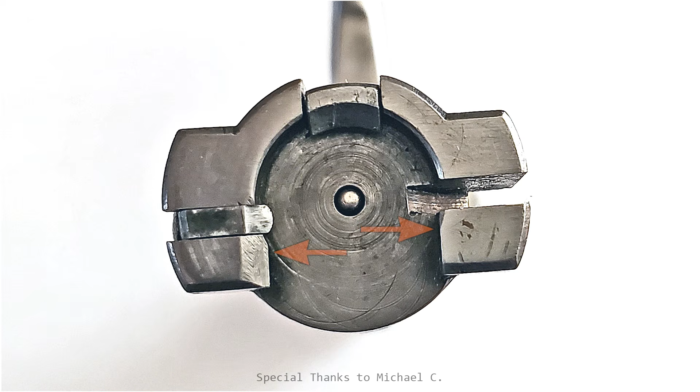In an attempt to correct this issue, Mauser began, well, originally over-engineering it. By the time of the Spanish 1891, this had evolved into a set of grooves on either side of the bolt face, which would grab the cartridge right away, however, without any spring tension. Then, as the cartridge rose during the feeding process, it would snap past this spring detent, which then kept it biased to the extractor, meaning it could not interfere with the next cartridge to feed. This proved troublesome and inefficient in actuality.

The new rifle was issued to the Saboya No. 6 Infantry Regiment and the No. 19 Battalion of Cazadores de Puerto Rico. In a month-long trial, they expended some 500,000 rounds of ammunition. This appears to have been done just over December and January of 1891-1892. Further experiments carried on into April, and requests for changes were made.

Paul Mauser himself would travel to Madrid in July of 1892 with samples of a new rifle and carbine to meet Spanish expectations. Just to be clear, at this same time, Sweden was also trialing the Mauser inventions, and they too were requesting changes. So it will ultimately be requests from both Spain and from Sweden that would add into what becomes our design today. If you'd like to know more about the Swedish decisions, well, we have an episode for that already. Their final rifle is actually pretty cool.

So what about the Spanish 1891 didn't work? What was changed? Well, sadly, I don't have the next gun in the lineage here to be able to show you because it would prove to be very short-lived. I'm of course referring to the elusive Spanish Model 1892, named as such because it was adopted in November of, you'll never guess this, 1892.

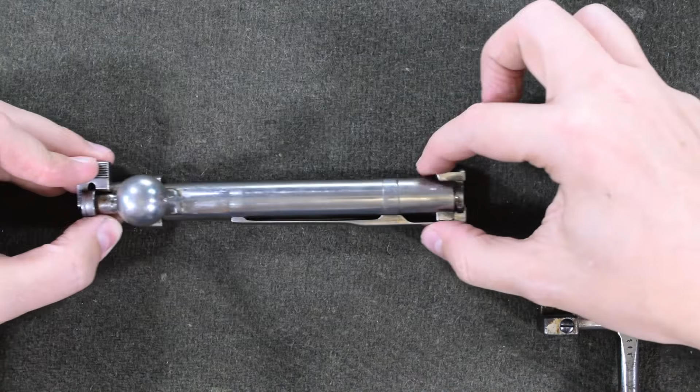And then if we fire and there's a case head separation or other rupture, you may have gas leak down the raceways. Well, they're going to get into the shooter's face because the locking lugs will have been turned, and therefore the lugs will not be blocking those raceways. It'll come down and it'll get stopped by one of these little wing-a-dings.

Now, these were actually added later on to the Argentine rifles in Argentina, which is why I kind of need this Ottoman 1890 to show you, because it's a little uncommon to find them on the Argentinian guns. But look at that. Perfectly smooth, and therefore not as likely to defend your precious eyes from a gas leak.

While I'm in this position, I want you to see the safety. This is a 2-position flag safety from the Ottoman 1890, and you can see we have a screw here. What's underneath that is a spring and a detent/plunger, which allows this to bias into one of its 2 positions.

Now, this is where our new 1893 deviates from what would have been the design that's in between these two, because the design in between these two would have still had the detent, it would have still had this screw. This does not. We'll see what this was replaced with in a moment. And at the same time, it would have had a 3rd position. Let me explain those positions to you.

On our Ottoman rifle, these are the 2 positions. Fire, where we can discharge the rifle, or safe, in which we cannot. At no point in the safe process, even in this middle position, can we open up the action. We have to be on fire in order to withdraw the bolt.

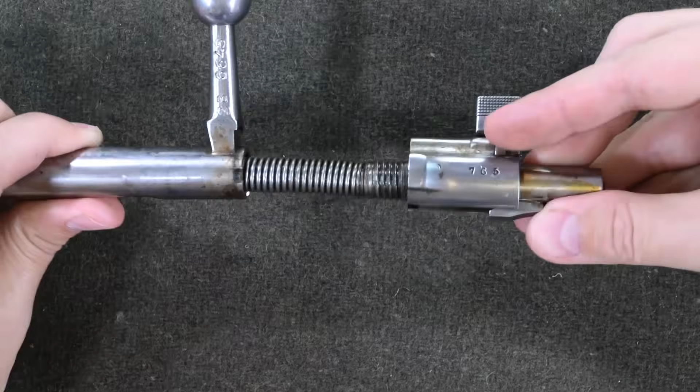What that middle position has done for us is it's held the cocking piece to the rear, whereas the previous design we'd have had to pull back on this. And with it rearward, we're able to do a little magic. We can just go ahead and unscrew our firing pin assembly from the bolt body. Now, this feature was already in the 1892, and another feature that was already in that gun is the perfectly always set firing pin position.

Because on the earlier guns, they would have been threaded in, and in this case, we have an interrupted lug pattern. Let me show you that. Previously, we'd have to depress this cocking shroud, and then start rotating this guy like a screw. But in this case, we now just have to turn him 90 degrees, and then we're out.

So ignoring the other components for a moment, that means that once we have set our depth to a fixed point and turn 90 degrees, our firing pin is set in relation to the cocking piece. That means that since the sear engages right here on this lip, this distance is always set correctly, that distance between these 2 points.

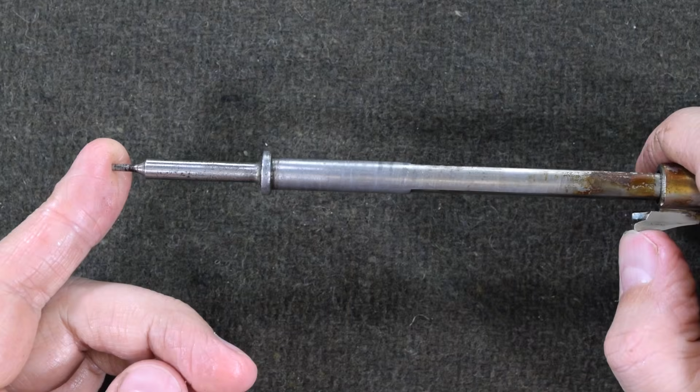So that means you're not going to end up in a situation where this is overset and therefore poking a primer too soon, or underset and therefore not striking a primer when you intend to fire the gun. This is a critically important little advancement that really makes sure that this is idiot-proof.

The final advancement of the 1892 bolt, which carried on into the 1893 we have here, is this groove right here. This is a safety notch for the front of the sear assembly for the trigger. So you'll see this better in an animation in a moment, but the short answer is if this gun is anywhere out of battery, as in if this is not perfectly aligned with what would be the poker for the sear, so if we're here, it can't poke, then the gun can't fire.

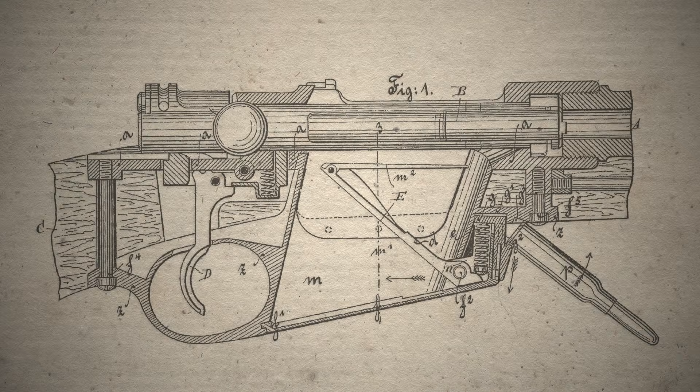The trigger cannot be dropped far enough to release the sear. Once it's aligned perfectly, it can poke in there and the sear can be released. That makes this a very effective and simple out-of-battery safety. Other features of the 1892 include its integrated single-stack magazine, which could be dismantled with the rim of a cartridge case. This, however, would not be carried forward.

Another important feature of the 1892 rifle, not this one, was the introduction on that platform of the 7mm Mauser cartridge. Paul Mauser himself pushed Spain hard to abandon his own 7.65mm cartridge because he was particularly proud of the performance of his new 7mm, and to my eye, he was right. Flat shooting, hard hitting, and not too terribly severe on recoil while still preserving a nice sectional density. It's a good cartridge.

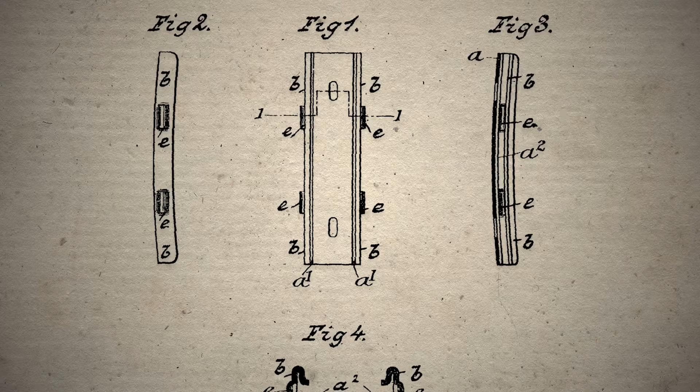So here's our nubbins on the new clip, and if we look overhead, we have corresponding little round grooves cut, and these actually have a slight taper to them. So when we insert this guy, those nubs bite down into the grooves, and the harder that these are to feed, the more pressure we have to put in, the more firmly our clip's going to bite into the receiver, and the more stable it's going to get.

So in other words, the more difficult it is to strip, the more this anchors into place until all the rounds are in. And then it's just sort of riding on top. There's not a lot of tension, and so you can throw your bolt forward, it'll pop that guy right out of the way, and then you're on to feeding your cartridges. That is a handy system.

I should probably finally talk about this action, which honestly, it's such a good design that it set the mold. And when you set the mold, you kind of become taken for granted. You become boring because everything looks like you. But this was innovative at its time. So let's take a look at what we got.

First of all, it's a rotating bolt, cock on close, which means that as I bring this bolt forward, we're going to see that our currently depressed cocking piece is going to come popping on out. That's the full cock. And then if we fire the rifle, we'll see it drop. Boom. Now, pay attention, because just because it's cock on close doesn't mean that there's zero camming happening. If I start to open this, you're going to see it come out just a little bit.

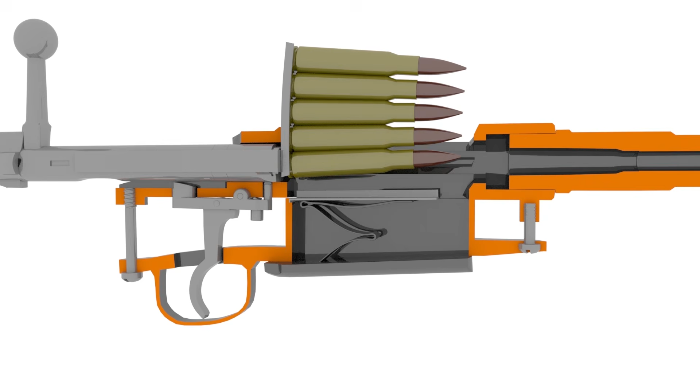First, we load up the rifle with the improved stripper clip, which double stacks 5 rounds into the flush fit magazine. Note the long, non-rotating extractor. As we feed the first round, its rim is quickly slid up under the extractor lip, providing a controlled feed and preventing unnecessary snap over. As we withdraw the bolt, the extractor brings the spent case along, driving it into the spring-loaded ejector, which flicks it from the action.

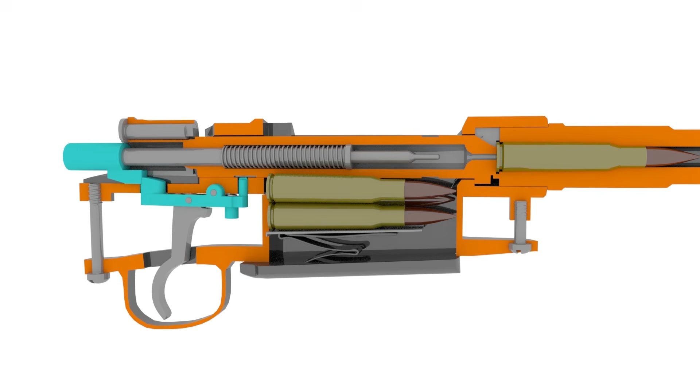Here is the firing pin, which is constantly pressed forward by a coil spring. The firing pin is held rearward by the cocking piece. The cocking piece is held rearward by the sear. Pulling the trigger tips the sear and releases the cocking piece, firing the rifle. As we raise the bolt, the cocking piece is cammed slightly rearward. This is just enough to retract the firing pin. Otherwise, the bolt remains decocked until bolted back forwards when the cocking piece snags on the sear, making this a cock on close action.

The 1893 uses an improved flag safety. Rotating the safety drives a circular wedge against the cocking piece, camming it slightly back and preventing it from traveling forward. At the same time, a quartered projection at the front of the safety turns into a notch on the bolt body, preventing the bolt from being rotated open.

This projection off the sear is the out-of-battery safety. Because the sear is a tipping block, this tip must be able to rise in order for the rear to fall. It can only do so, however, when a small notch in the bolt body is aligned, which means it isn't possible to fire the rifle out of battery.

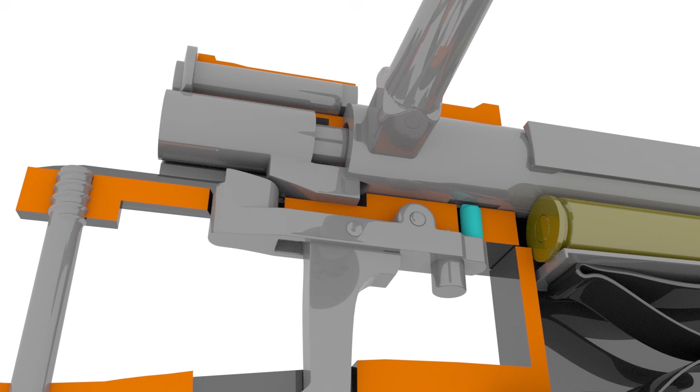By the way, the trigger on this rifle is a 2-stage design, meaning it first flattens out at the top, and then as you pull over the rear hump, the sear is dropped enough to fire. Finally, the follower, powered by a simple folded flat spring, rises to block the path of the bolt, indicating that the magazine is empty. Now let's go shoot it.